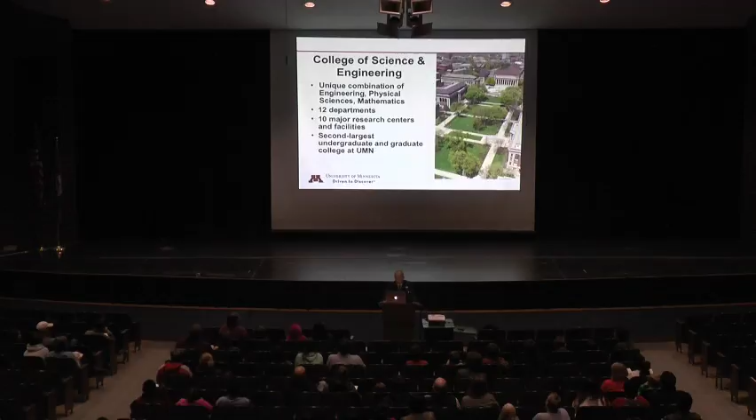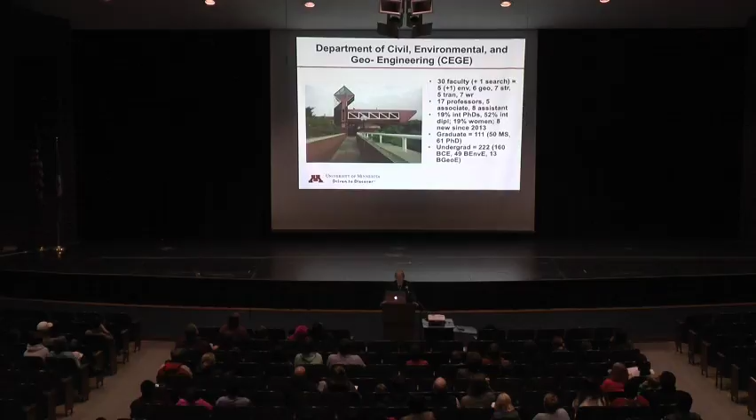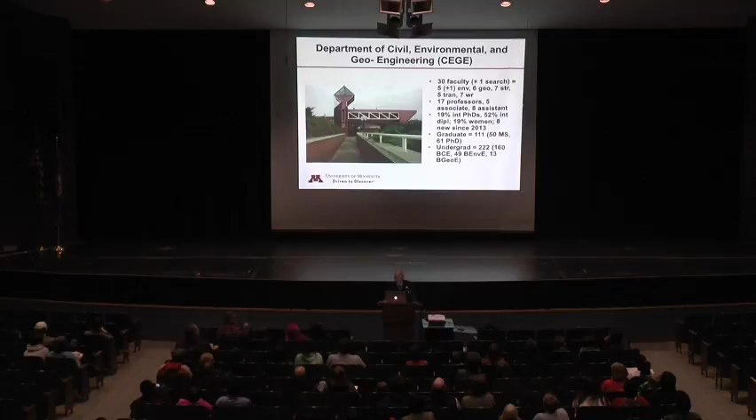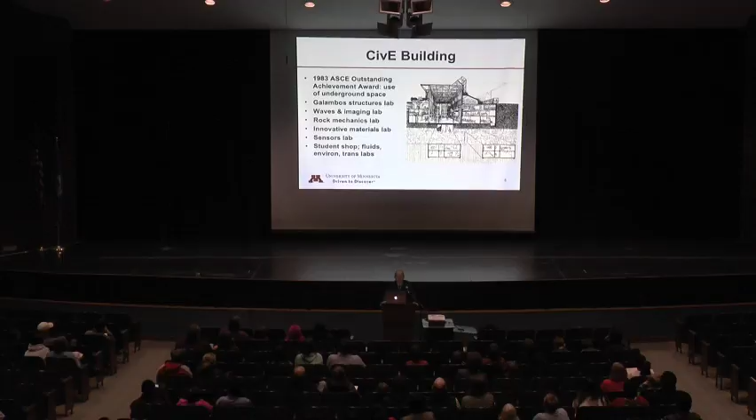I'm in the Department of Civil, Environmental, and Geo-Engineering, and we have a very unique building because you see very little above ground. Most of it is below ground, so 95% of our building is underground. We have some outstanding faculty and students, and getting back to our building, in 1983 it won the American Society of Civil Engineers Outstanding Achievement Award for use of underground space. We have outstanding laboratories, and I'll be talking about some results from the laboratory where I work, and that's the Rock Mechanics Lab.

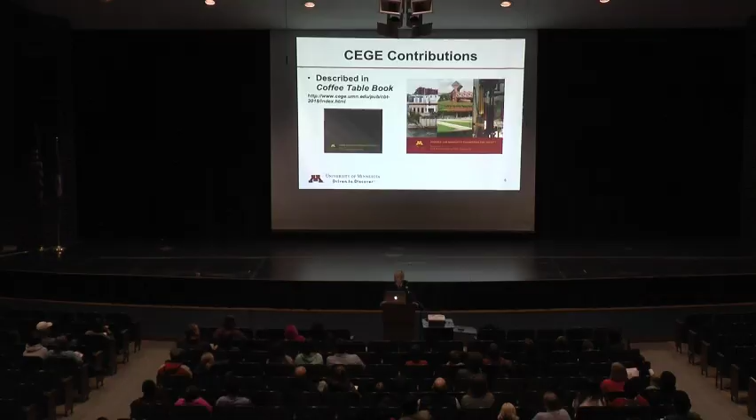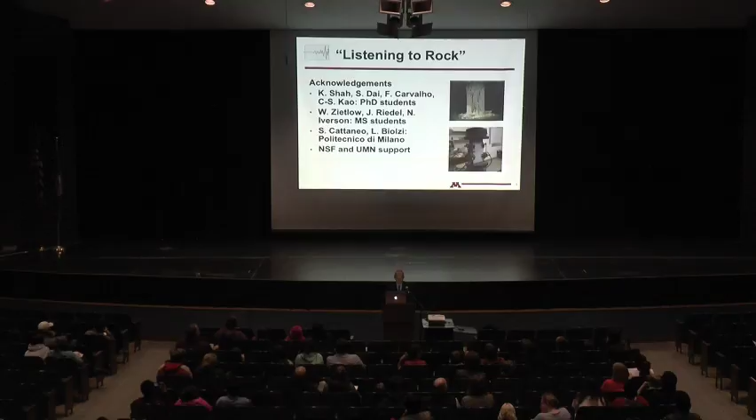Okay, with that, one of the major problems in several branches of engineering is to be able to identify what is often referred to as the mechanical conditions associated with failure. Some of you are aware of the tragic events that took place just over 11 years ago. That was the collapse of the 35W bridge. Indeed, that was a tragic failure that should never have happened. And engineers spend a great deal of time evaluating materials and designs to make sure failure doesn't take place.

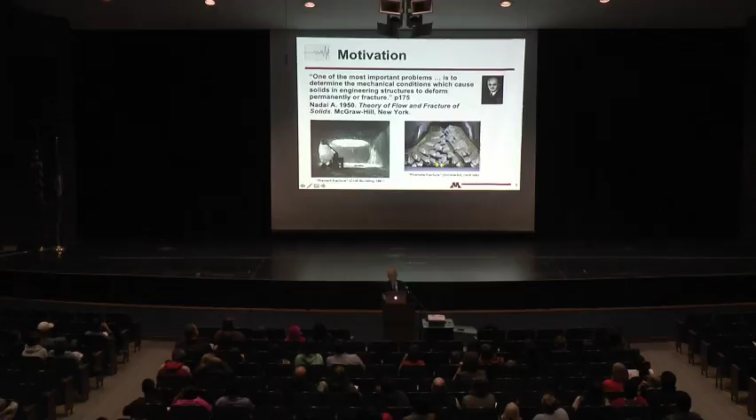And the other example I have is one of a drilling bit. So I want to break the rock, I want to excavate the rock, so indeed I need to fail it. And I want to know under what conditions might I efficiently, with the least amount of energy, excavate this rock.

Again, a few other examples where these are cases where failure was not welcomed. It should not have happened. But again, there are cases where we do want to develop failure, and we're going to be looking at those cases and identifying characteristics about how the material is failing that may help us certainly understand how it's failing and then improve methods for causing it to fail.

I'm going to start out, though, well, hopefully more than reviewing, but telling you a little bit about rock from the perspective of a civil engineer and not from the perspective of a geologist, of an earth scientist. So to me, the particular origin of the rock is not that critical. More critical to me are its mechanical properties. And I'll review with you, or I'll explain to you some of these mechanical properties.

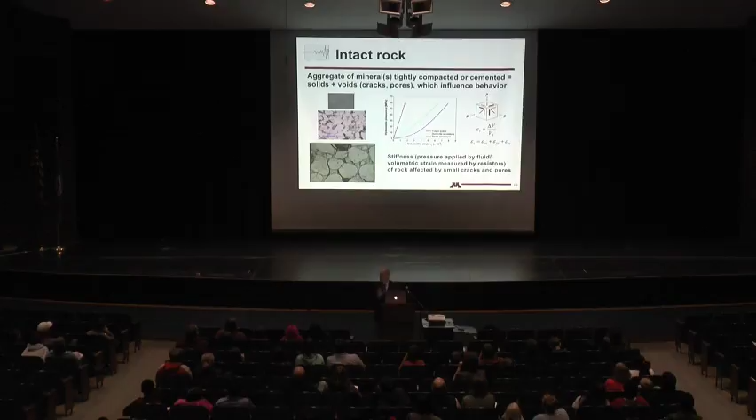So, in a very simple way, I could think about rock as a collection of grains that are glued together. And certainly because I have a collection of grains, there may be space between these grains. And that space I could simplify into two forms: pores, so spherical-like cavities, or very thin, narrow cavities, more crack-like. And these features have a very important effect on how this material behaves.

So I have an example here of a piece of rock that I instrument in a special way, such that I could determine the volume change. So what I want to do to this piece of rock is subject it to pressure. I'm going to place this rock in a fluid where I could increase pressure of the fluid. I'll isolate the rock from the fluid by putting a membrane around it, so the fluid is not going to enter the rock. And I'm going to be able to measure the volume change that takes place.

And what I have plotted here is the hydrostatic pressure versus volume change divided by the original volume that I started with. And that's referred to as volumetric strain. And I have to explain, though, these pressures that I'm applying to this rock are fairly high. Atmospheric pressure is about 0.1 MPa, megapascals, 100 kPa, kilopascals, or we say 1 atmosphere, right? I'm applying pressure much higher, hundreds of atmospheres. And I want to see how the material behaves.

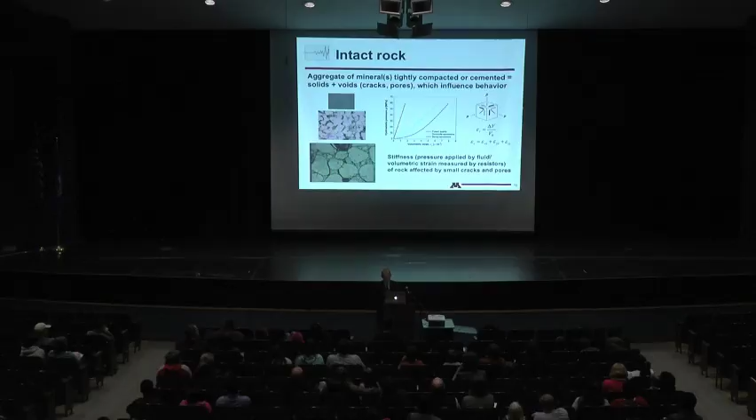What's taking place here is some of the cracks are closing. So this nonlinear behavior is due to cracks closing. And what I'm seeing here in this linear part is the behavior of the collection of grains and the pores between the grains. And this behavior is very important in understanding how this rock is going to behave under certain types of loading conditions. So, for example, rock in the ground is surrounded by other rock that pushes on it. So if I excavate a hole, I'm going to change how these forces are acting within the rock. And I need to know how the rock behaves to make sure that the tunnel, in this case, is safe.

Okay, another feature of any rock-like material. Oftentimes we use this term rock-like, and that is if I take a piece of rock or a piece of concrete or ice or ceramic and I apply a force to shorten the specimen. We refer to that force as a compressive force, and I apply the largest force I can to that material. So there will be a limit to the amount of force that I can apply. And if I measure the force and I know the cross-sectional area, I could define a term that is called stress. So we can think of stress as an internal force per area. And there will be a maximum stress that I could apply to this material.

Now, if I take this same material and instead of squeezing it, applying a compressive force, I pull on it. Rock-like materials are very strong in compression, very weak in tension. So this ratio of the UCS, which I'll use the symbol capital C sub 0, and the tensile strength, UTS, and I'll use the symbol T, that ratio is greater than 10. And I have an example here of one of the rocks that I showed previously, and those rocks, by the way, were sandstones. So this also is a sandstone where if I apply compression, I measure a strength of 20 MPa. If I apply tension, the strength is 1.5 MPa.

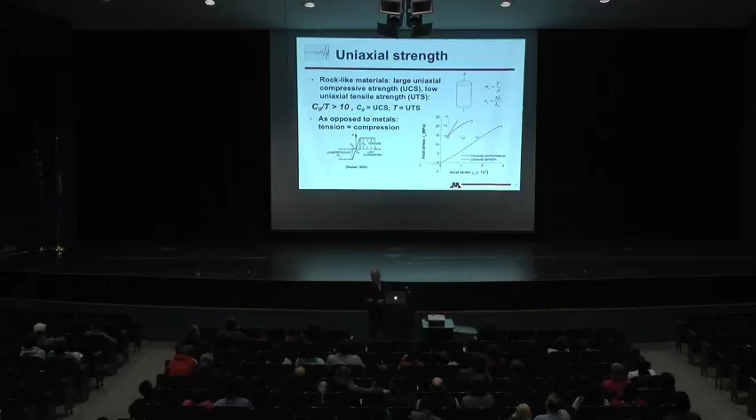So a drastic difference. In addition, another very important behavior that's shown here is this slope, when I apply compression, is higher than when I apply tension. And that's because of the presence of the cracks. So again, this mechanical response is important for an engineer to be able to excavate the rock in a safe manner or to be more efficient in how we excavate the rock.

Okay, so some more mechanical response. Now we'll get a little more complicated loading. And this is loading where I apply pressure, but after I apply pressure, I want to squeeze it. And this now is getting closer to what happens in the earth. Because in the earth, of course, there is neighboring rock. And the deeper you go, the more stress or pressure there is surrounding that piece of rock.

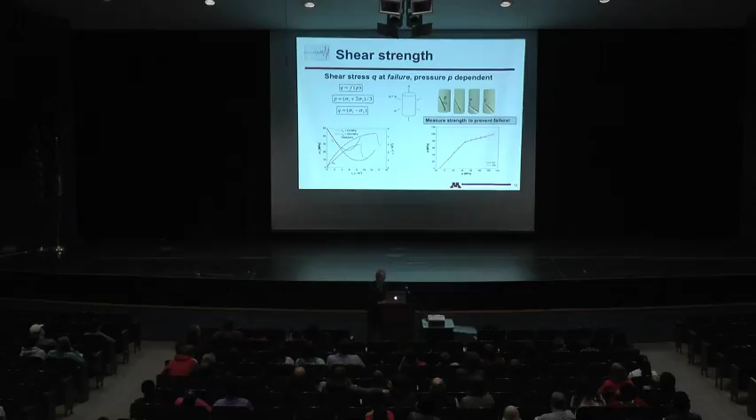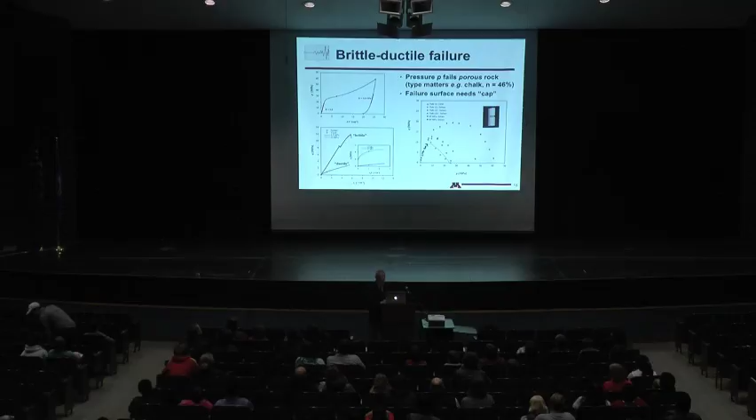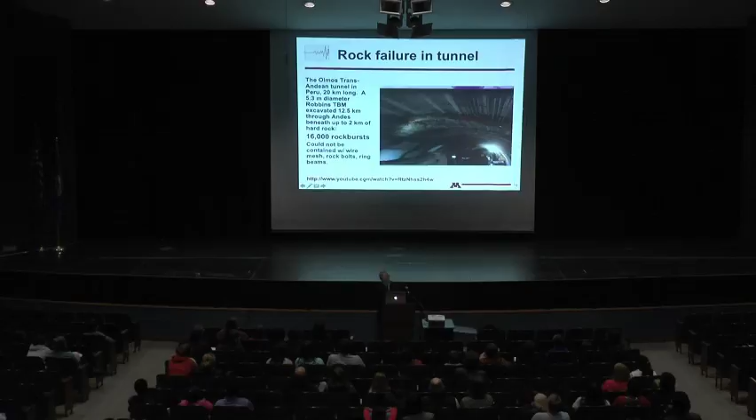About 12.5 kilometers was through the Andes, where over a mile of rock was above it. And something was happening, and that something is given the name rock burst. So there were over 16,000 rock bursts, and you're going to hear rock bursts. And basically the rock was failing. So if you want to view this video, it is on YouTube. So I'll pull it up. And let's play it. So we're underground in an 18-foot diameter tunnel.

Sorry about that. So let's try again.

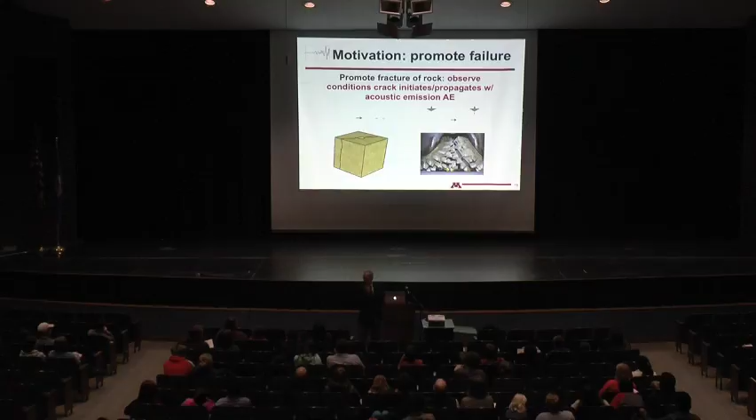So there are many applications where we want to fracture rock, and this comes about by a number of different ways. It could be by temperature change. It could be by the stress that we're applying to the material. Basically what happens is the material has defects, has small cracks and pores, and depending upon the change in stress, this crack can grow. And when the crack grows, it releases energy. Part of that energy is in the form of an elastic wave.

It could be a sound wave that we hear, but what we hear will be dependent on the size. So larger size cracks we can possibly hear. Smaller size cracks we can't hear, but we can record. And these small cracks, as I said, this transient wave is referred to as acoustic emission, and this is one of those signals that we can record by cracks forming within the material.

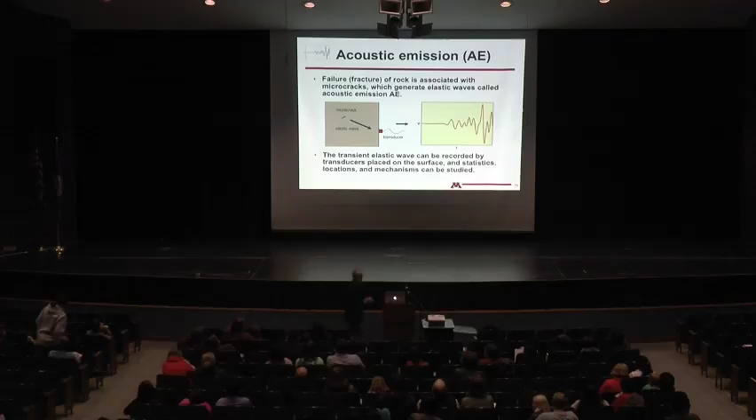So we want to use this information, this signal, to tell us something about how the rock is behaving. Are there cracks forming? Where are the cracks forming? And how strong are those cracks? And certainly these are questions that a seismologist asks and answers as it relates to earthquakes, right? We want to know where the earthquake took place, the location. We want to know the strength of the earthquake, the Richter magnitude.

So you know that bad earthquakes, strong earthquakes could have a Richter magnitude of 6 or larger. For us, our Richter magnitudes are -4, -5. And the Richter scale changes by factors of 10. So we're talking about very, very small amounts of energy that are released. But we can use the same techniques that are used to study earthquakes to study these small cracks.

Okay, so that's what I'm going to be presenting now, results on finding these small cracks. I want to locate them. I want to see what's happening to the material because I'm doing something to it in terms of causing this fracture. And then I want to find out how strong these cracks are. That is, how much energy was released by these cracks.

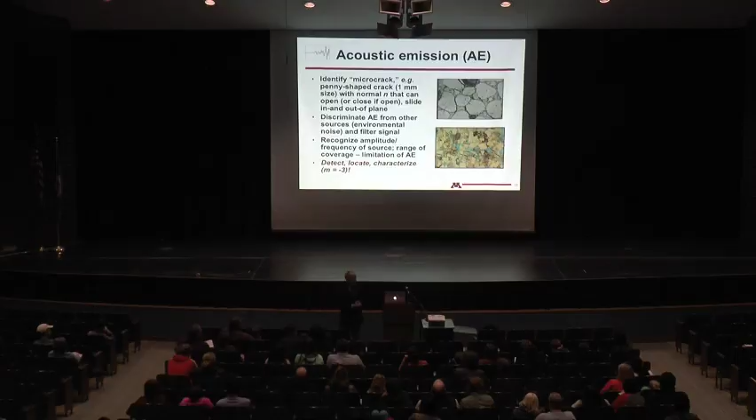Now, of course, as I said, this problem has a very important application. And in fact, this AE phenomenon was observed in the United States in the 40s in evaluating mining activity. So some of you may remember that we did in the Twin Cities have a Bureau of Mines. It was a research center right off Hiawatha near the airport. Obert and Duvall operated out of the Bureau of Mines in Denver. So they wrote 2 famous reports using this so-called microseismic technique to evaluate safety of mines.

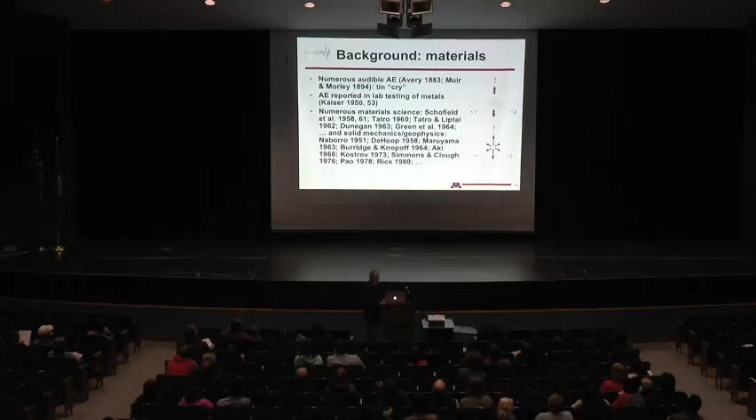And this then really took off all over the world as a technique that is quite powerful in evaluating when the rock is breaking. Other areas of application have to do with materials. So there's a famous study that took place in Germany by Kaiser to use AE to evaluate how metals behave. And of course, within the area of seismology, that is the study of earthquakes, the theory, the analysis is quite rich in locating the earthquake and in telling us the strength of the earthquake. So we'll be applying those techniques to little cracks that appear in laboratory experiments.

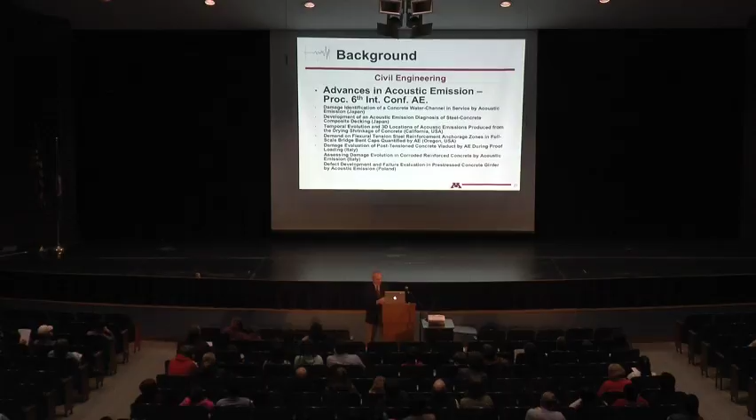To put in a plug for civil engineering, there are a number of applications in civil engineering where acoustic emission is used for bridges, bridge decks, looking at behavior of materials, and so forth. Okay, so let's move along. This is going to be results from laboratory studies, so it's going to be small-scale experiments.

And what that means is if I stress it, so if I produce some type of loading on this material, but this loading has to take place rapidly, a charge will develop. And if I measure that charge, I could say something about what was happening where I had this sensor, this piezoceramic material. And that's what we're going to use to capture these signals from the AE, from the acoustic emission.

Another very important characteristic is the data acquisition system, that is, I have to record these signals. These signals have a high frequency, so I need a fast data acquisition system. So I'm going to use a digital oscilloscope. So an oscilloscope to be able to record these high frequency waves, and digital such that I could easily perform some signal processing on this information.

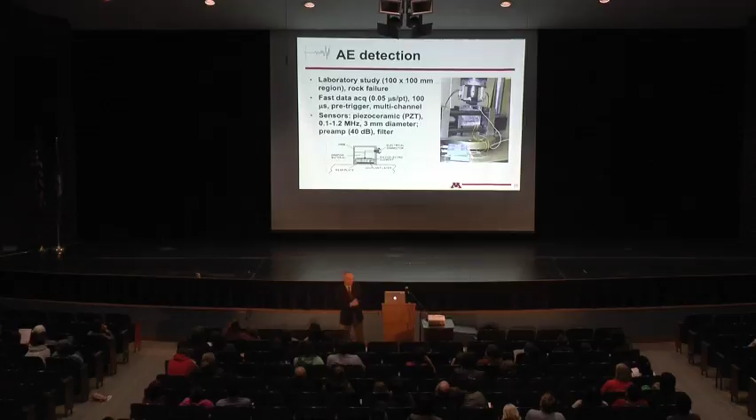For us, a key bit of information is location. Location, location, location. So I'll be able to find where that little crack took place. And there are a number of ways of doing this. Well, first I should mention that in terms of how well I could locate that event, within a few % of travel distance. So if my travel distance is on the order of tens of centimeters, let's say 10 centimeters, then I could locate it within a few millimeters. So my locations, I believe, are quite good.

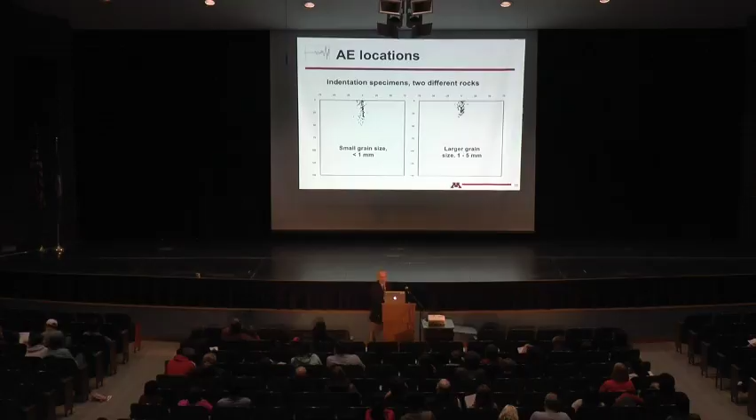And I could use different loading. This is an indentation specimen. This is an analog to cutting rock, because basically the way rock is cut is we take a steel tool and we push it into the rock. We indent it. So this is showing the formation of the crack for 2 different types of materials.

Okay, so I hope I convinced you that this AE technique is a very powerful way of evaluating fracture. But it's good to have redundancy in our measurements. How good is this method in finding the crack? Well, I could use another technique that's called DIC, digital image correlation.

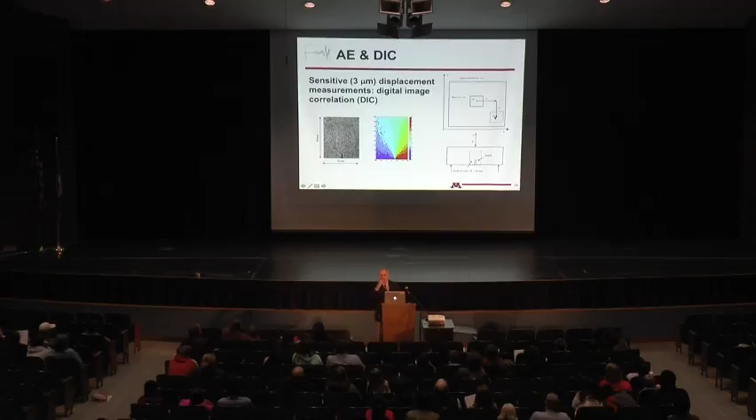And the way I'm going to do this is by using digital images. I'm going to take a picture. So it's shown here as a circle, but that's a particle that I have identified in one picture, in one image. I'm going to find it in the other image, and that's going to allow me to determine the displacement. And that's important because you'll see how I can identify a crack from this displacement.

So now let's look at some results. This is a result of this imaging technique where I'm plotting contours of displacement. So the different colors are associated with displacement in the x direction. So what this means is this dark blue, the particles at this position are moving to the left. The minus sign means to the left at a value of -5, and it happens to be 5 microns. So very small displacements.

And on the other side, more or less the same value of 5, but to the right. And certainly what that means is that a crack is forming, because a crack is a feature where if you look on one side, it moves that way, and on the other side, moves the opposite way. That's a definition of a crack.

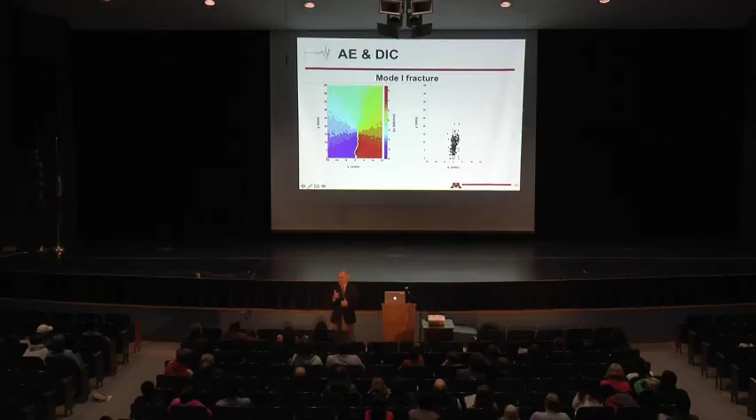So I'm identifying a crack which has a very small opening, microns in size, and I can compare that to what I see with my AE, with these locations. And indeed, if you look at the locations, I would argue that it's picking up where that crack is forming. And I could apply a slightly different loading where the crack forms at some angle, and you see the AE is picking up those locations very well.

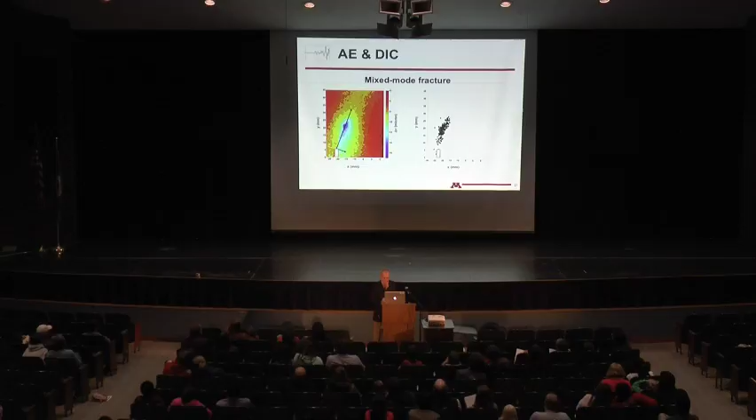Okay, so I have this very nice technique that could identify fracture. Is there some way that I could quantify how grouped, how clustered these little cracks are? So certainly it's nice to look at it and say, wow, that's where the crack is. But could I have some quantitative way? I want a number. I'm an engineer. I want a number that tells me that indeed I have a crack. And there is this technique using a fractal dimension.

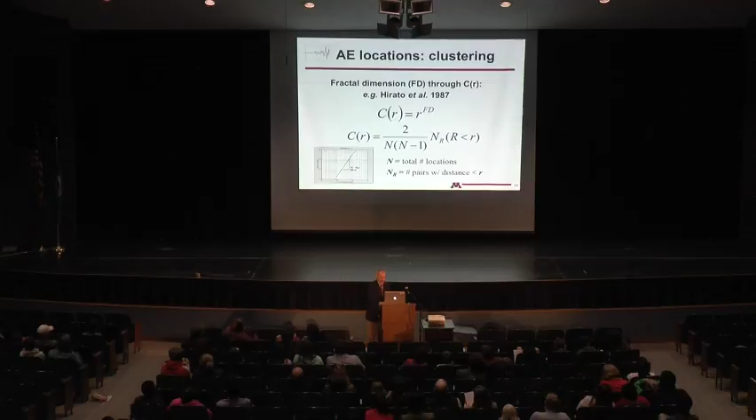So in this case, I'm going to use a fractal dimension, a fractal number, to identify how scattered or how clustered these locations are. So we can think about this fractal dimension that if the events are totally at random, the fractal dimension will be 3. That is, they could be anywhere in 3D space. If the fractal dimension is 2, then they must be on a plane. And again, that is one way of thinking about a fracture. So a fractal dimension of 2 tells me that I have a fracture.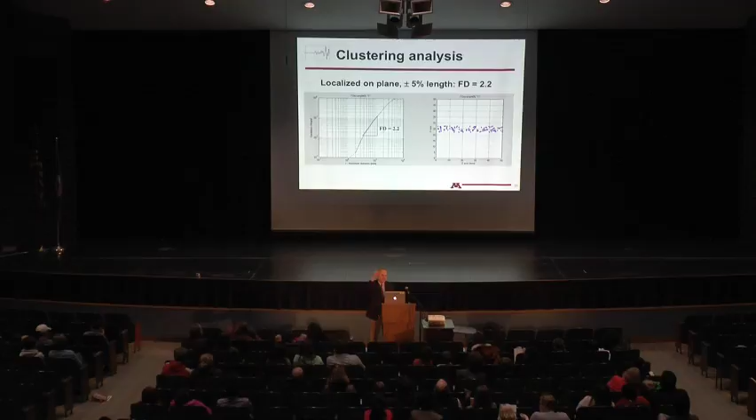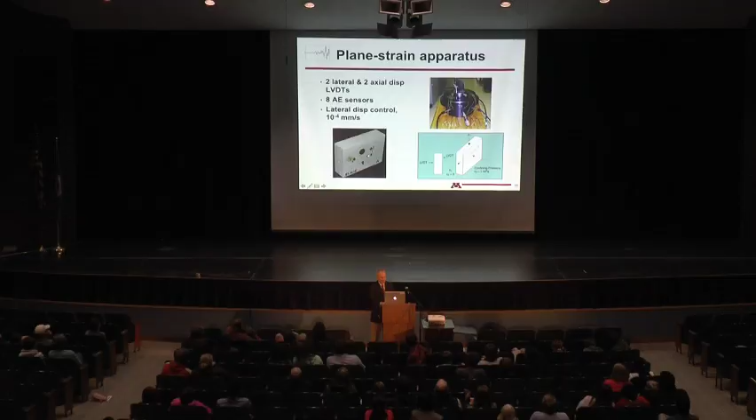So I'm going to put this rock in a chamber where I can apply pressure, and I can apply axial stress. And I want to monitor how this crack is forming. So when I started, there was no crack there, and then when I did this loading, I got a crack. So let's look at the AE locations. The other thing I did here was to put a hole in it to get the crack to start by the hole, so I know where to look, right?

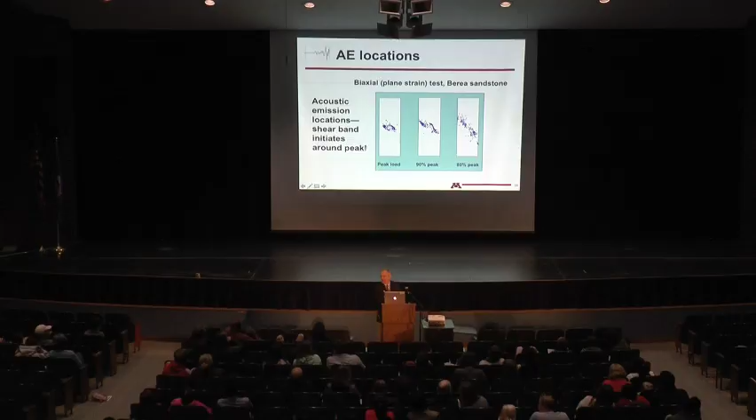And you see a number of AE around the hole, which is what you would expect. And as I continue to load, something like a fracture seems to be forming. And it seems that the fracture is growing, right? So is there a quantitative way of evaluating this? And indeed there is, and that is this fractal dimension, that when it gets to be 2.5, and that is right where the load is maximum, the crack is formed.

Okay. Now in 3 minutes, you're going to learn about how we can identify the magnitude of the earthquake. So location, location, location. How about the strength of the earthquake? How big was the earthquake, and what did the earthquake do? Did it slide? Did it open? Did it slide and open?

And we can do that in the same way that we do that for earthquakes for these little cracks. So this little cartoon is a little crack, and this little crack is just opening, and it's opening in the vertical direction. And there's a way of representing this effect. That is, I could represent this little crack, this guy, by this combination of forces.

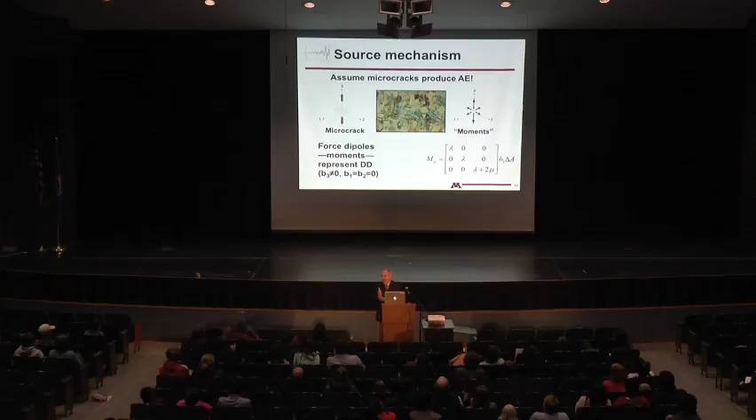Now, it has to be a special combination, but indeed there is a special combination of forces that could model, that could give me this crack that opens. And that's what I want to use to evaluate these little cracks. And that's what's used in seismology to tell us the strength of the earthquake.

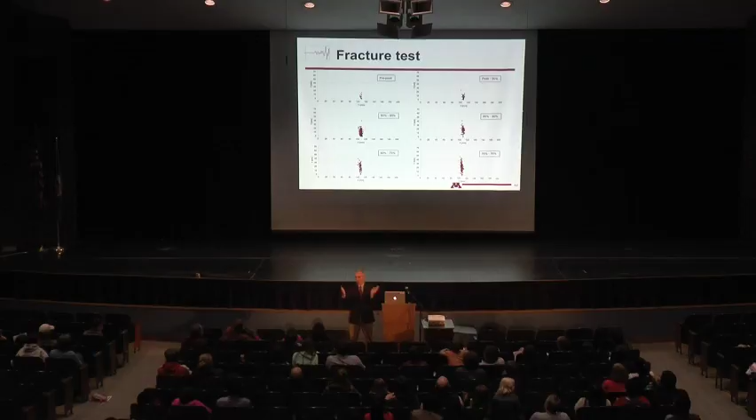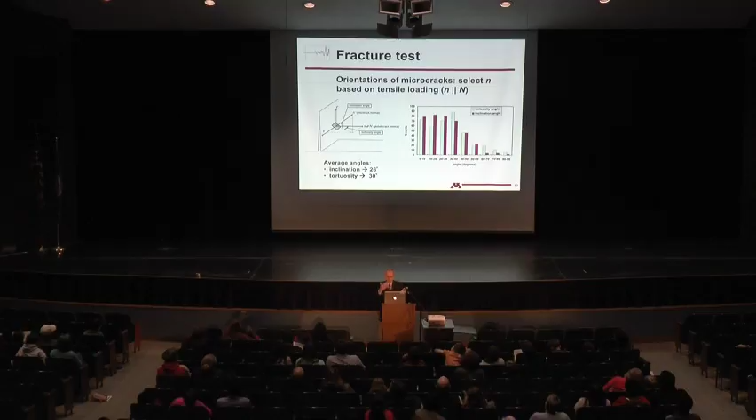Okay, surprisingly, many, many little cracks aren't just opening, because of course the main crack is opening. But on the small scale, the cracks are sliding, because the large crack is tortuous. So the little cracks have to slide and open, and that's what this bar chart is showing. So this angle measured is a measure of how much it's sliding and opening.

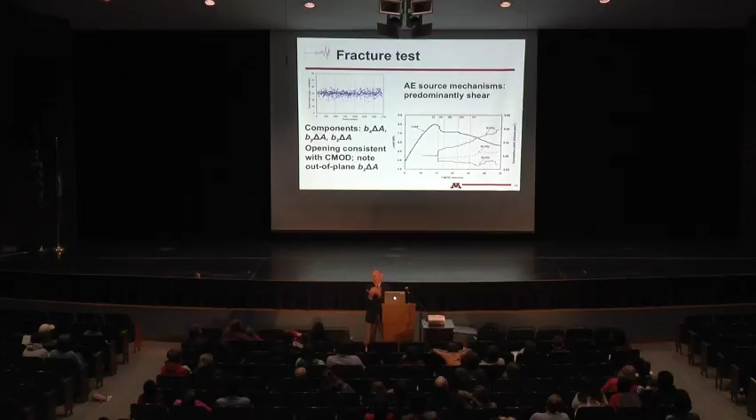So the component Bx times the area of the little cracks is the largest of the three components. There is a component associated with the vertical direction, and surprisingly, there is a component of the out-of-plane direction. Okay, so I'll skip that and go to the summary.

AE is one of the best methods to identify fracture. So be it in a rock specimen, be it in the earth, in a bridge, in a mine, this technique is, in my opinion, the best way to identify where a crack is taking place. And of course, the way to do that is to locate it. And the location problem is not that difficult. Certainly this problem of trying to quantify the clustering is a little more challenging, as is the mechanism.

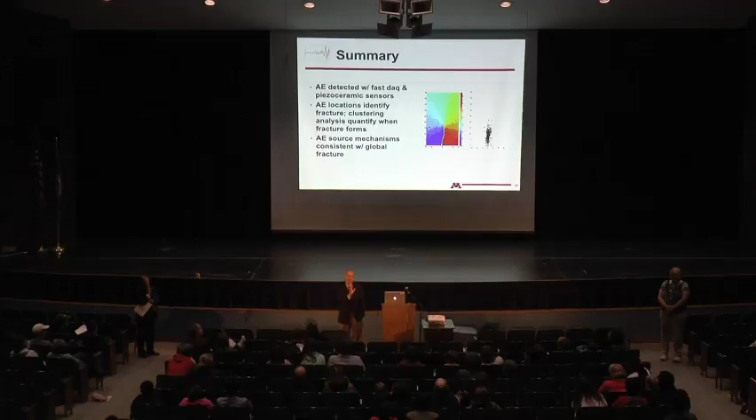What would happen if you hit a rock with a laser continuously? Okay. So the question was, what happens if I shine a laser on the rock? So certainly it depends on the intensity of the laser. So, right, we could take a laser pointer and I could shine it on the rock and nothing's going to happen. But I could also say that there are techniques to use a laser to measure displacement. So one of the things that was really important in some of the behavior I was showing is how the material is deforming. So I could use a laser to determine that displacement.

I think you want to break the rock, right? So if you pump enough energy into the rock, you could break it with a laser. Now, it's not a very efficient way of doing it, but you can do it. So, in fact, there have been studies to use different heating sources to excavate rock. It's not a very efficient way of excavating rock, but you could do it. Okay. And 1 second.

At what temperature does rock freeze? Does rock freeze? Yeah, so rock is a solid. It'll stay a solid if I continue to lower the temperature. Certainly there is an effect, as was asked, in terms of heating the rock, but also cooling the rock. That is, change in temperature depending upon, for example, geometry. I said this effect of a tunnel, and I change the temperature. So if I lower it, I could generate stresses. And if I have a rock and I lower the temperature far enough, because locally the grains are slightly different, I can get some cracking.